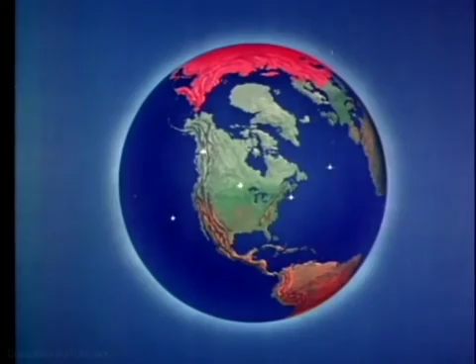Sprawled across North America, from the polar ice cap to the Mexican border, is a giant with 1,000 eyes. Day and night, fair weather or foul, he guards his homeland. This giant is the air defense system of North America, a vast and intricate maze of radar networks. Through the electronic eyes of this giant, we are able to see the enemy before the enemy sees us.

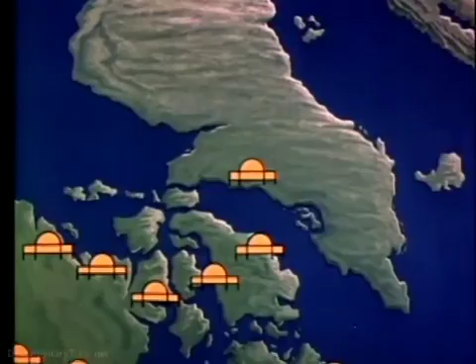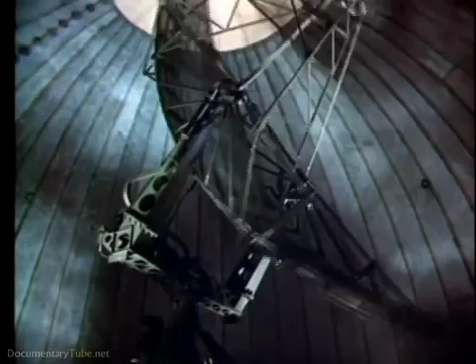These radars never sleep. Round the clock, they stand ready to do their part in minimizing the penetration of enemy bombers. And round the clock, their quietly pulsing hearts, the magnetrons and the klystrons, help generate the power for peace that keeps America strong.

These microwave power tubes, the magnetron to generate the radar signal, the klystron amplifier for radio communication, and radar are the subject of our story. It is a story about these vital tubes, but even more about you, the men who work with them. When you have a well-trained maintenance man with a well-adjusted radar at a well-chosen site, then you've really got a winning team.

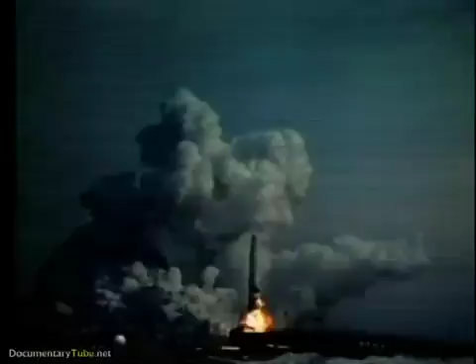They keep the airborne radars operating and ready for crucial missions. In missiles that depend upon radar for guidance. In bombers that depend upon radar for bombing and navigation. In interceptors that depend upon radar for fire control. And in reconnaissance and search aircraft that depend upon radar to extend their vision.

Years of scientific research and millions of dollars worth of equipment have gone into this aircraft. But only if the maintenance men keep the radar functioning can it complete its mission. When something goes wrong, they've got to make a quick decision, whether to attempt repairs in flight or abort the mission.

There's trouble here, that's for sure. But what kind of trouble? First, they check the radar scope presentation. Sometimes this gives a clue. But the most reliable analysis comes from the test equipment on the monitor panel. The spectrum analyzer shows them the conditions in the circuit.

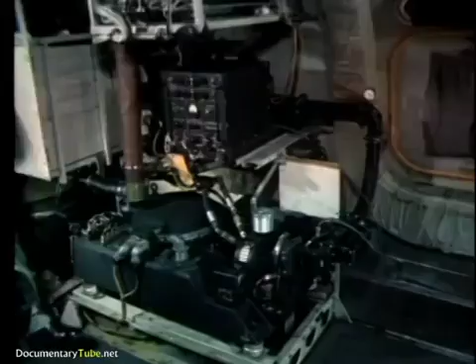The cause might be moisture in the waveguide, corrosion, dents, or scratches. Another trouble spot could be the pressurized antenna system. Loss of waveguide pressure will also cause arcing. Yes, the pressure's low. This is a danger signal. If this arcing continues, the magnetron output window may be damaged, the tube's vacuum lost, and the magnetron destroyed.

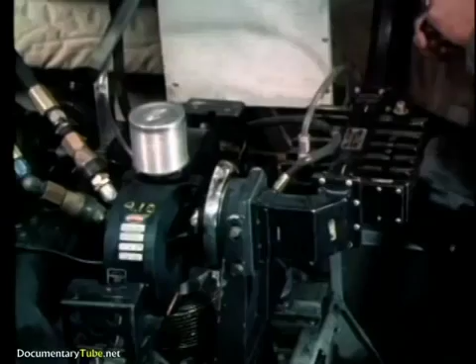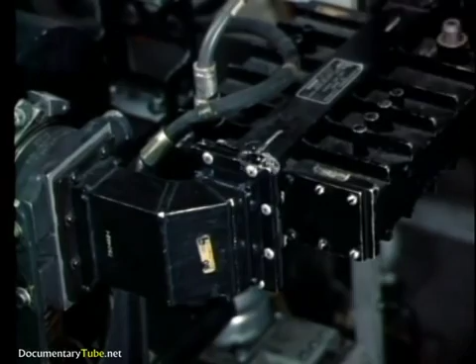Waveguide joints should be tested to make sure they're airtight. This man is making a liquid soap test. See where the bubbles are forming? He's found the trouble. But how serious is it?

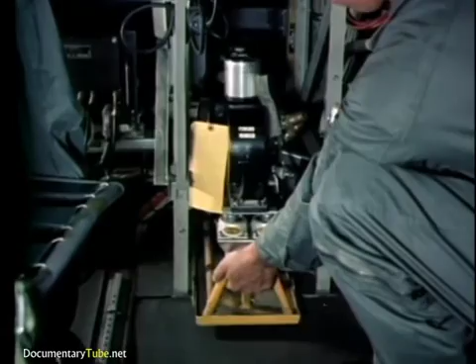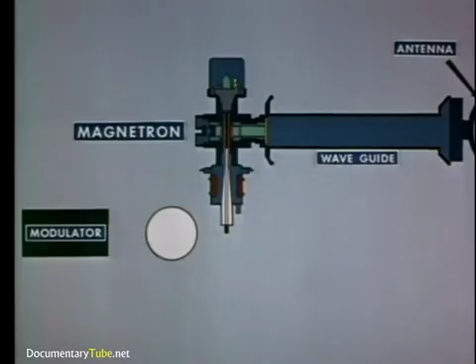While they're working, let's take a look inside the magnetron. Animation shows what caused the malfunction. We'll turn time back a few hours and show the Maggie functioning normally. As the pulse from the modulator is applied, the Maggie produces radio frequency oscillations to form the radar pulse.

This energy is then coupled into the waveguide and directed to the antenna for transmission. Energy is reflected back along the waveguide toward the magnetron. Normally, when the antenna system is in good shape, the reflected wave won't be strong enough to cause arcing at critical points.

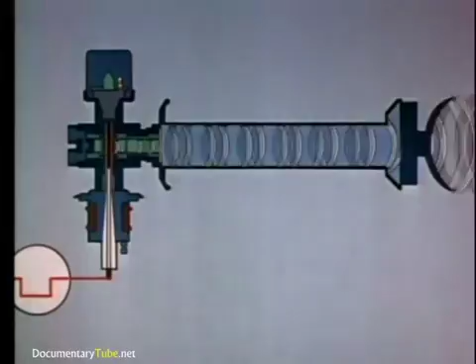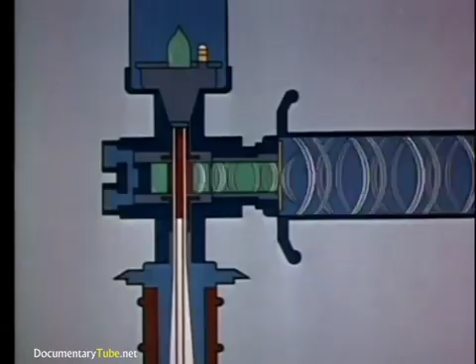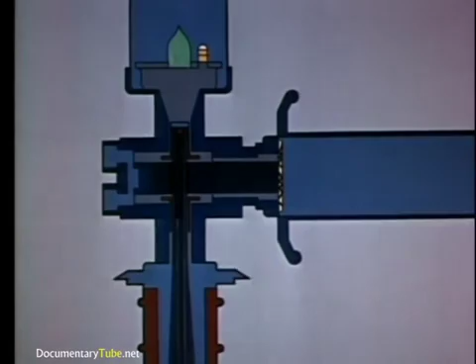But as conditions such as loss of waveguide pressure develop, the antenna characteristics change and the reflected wave becomes greater. Then arcing may take place at the point where the radar wave leaves the magnetron, causing the magnetron output window to crack or puncture. As the vacuum is lost, the heater oxidizes and burns out. The cathode cools. Air seeps into the interaction space, and arcing occurs with each pulse.

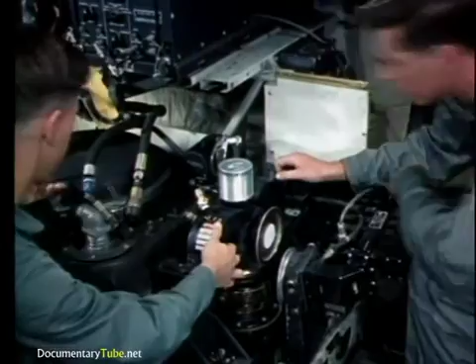After the magnetron has been unbolted, the filament and cathode connections are uncoupled. A large magnetron like this one requires 2 men to handle it safely.

Before a Maggie is replaced, all connections, mating flanges, and sealing surfaces should be inspected. Insulating oil should be examined for foreign matter. Damaged or worn gaskets should be replaced.

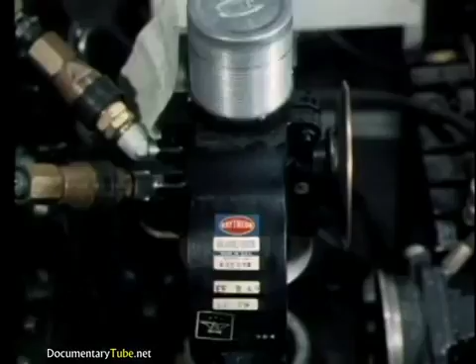Heater's supply voltage should be established at the value marked on the tube. Later, when the plane returns to base, the heater voltage should be double-checked with an accurate instrument. Now that the spare magnetron has been installed, further tests are necessary. The technician must make sure he has the required pressure and that there are no air leaks.

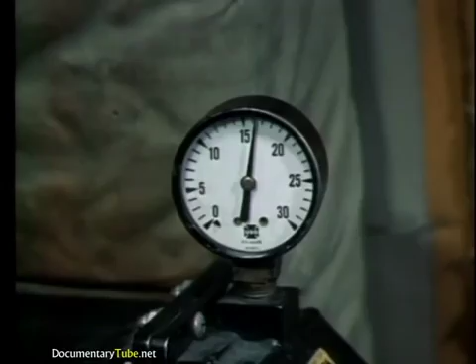Instructions concerning the care of pressurized antenna systems will be found in the appropriate tech order handbook. The liquid soap method is a simple way to check for pressure leaks and may be used where more accurate means of testing are not available.

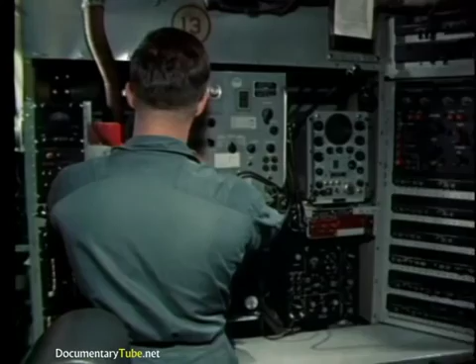Test equipment is used to analyze the performance of a newly installed tube. The output pulse is checked on the spectrum analyzer. See how the large hump or main lobe is symmetrical and sharply defined. The side lobes are relatively small. A presentation like this means that the Maggie is firing properly.

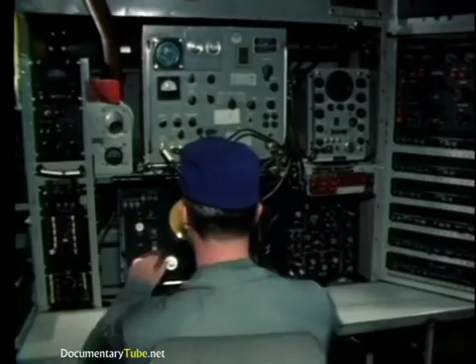Not only that, it means that these technicians know their jobs. They were able to analyze the trouble correctly and replace the magnetron in flight. Because they knew what to do, this aircraft was able to complete its mission.

Let's take a closer look at these microwave power tubes. Magnetrons costing from $100 to $10,000.

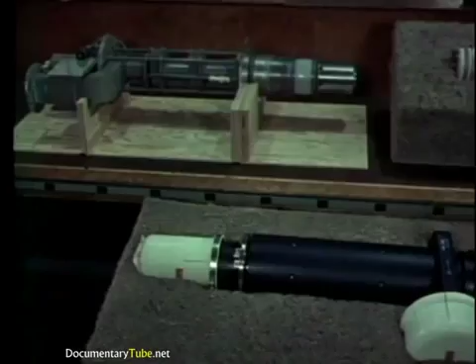Klystrons costing from $1,500 to $25,000 - why so expensive? Let's see what's inside them.

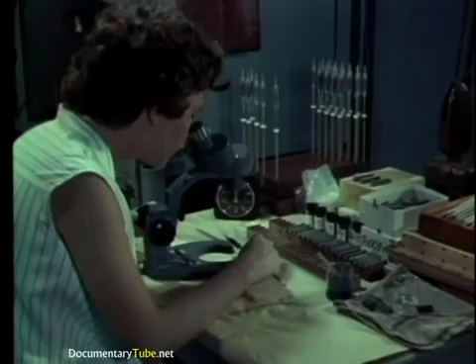Look at this. Parts so critical, they must be inspected through a microscope, with tolerances accurate to 4/1000ths of an inch.

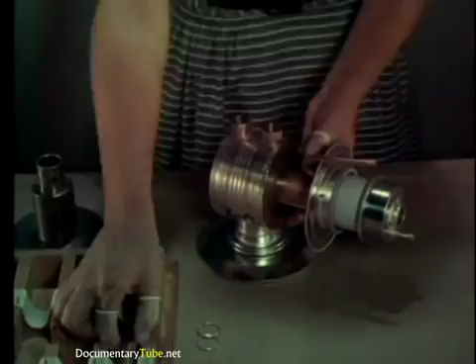To build them to such close tolerances requires involved manufacturing processes. Specialized parts must be carefully assembled.

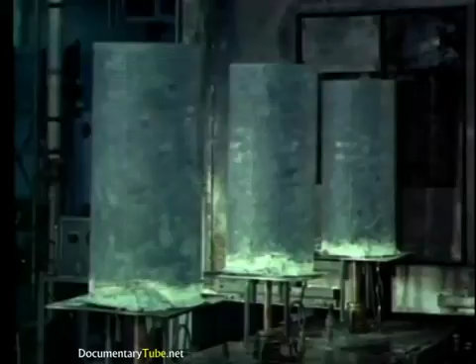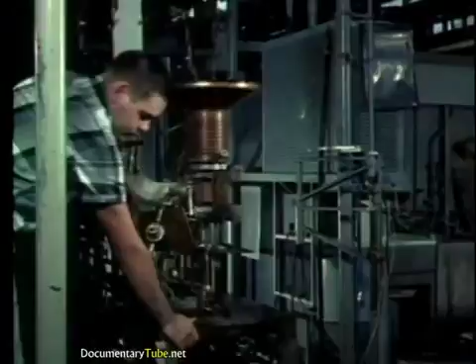The completed assembly is heat treated to bake out gas molecules, so that they may be removed by an evacuation machine.

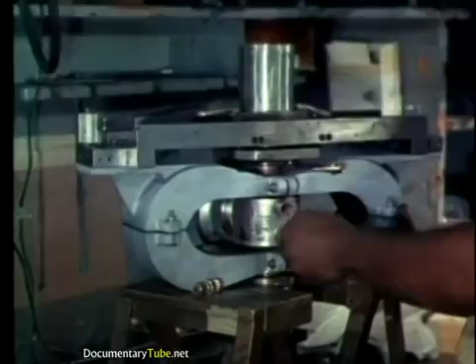External mechanical parts, such as couplings and magnets, are installed. The final step is rigid testing of electrical performance to make sure it meets the high standards required.

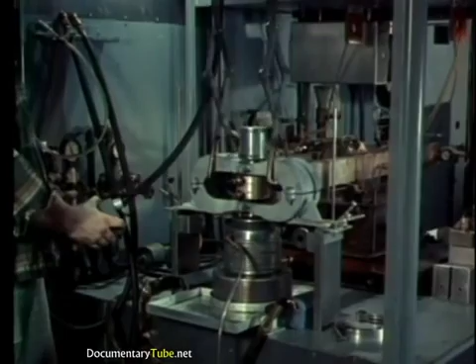Pressure tests ensure leak-proof connections throughout. Now the tubes can be put into storage. Even here, should tiny defects develop while on the shelf, continuous sample testing will reveal them.

Before shipment, the delicate tubes are carefully packaged. The quality designed in during research, built in during manufacture, maintained by rigid testing and careful storage, will reach the user intact.

Here are a few basic rules on proper handling. Always use two men to lift a heavy tube. A portion of a carton makes a good tube stand, protecting delicate parts from damage.

But a wooden rack is better and lasts longer. Save all the cartons and packaging materials. Use them to return defective tubes to the factory.

Magnetrons should be separated at least 12 inches, so their magnetic fields won't interlock. Don't store them on steel shelves or they may be degaussed.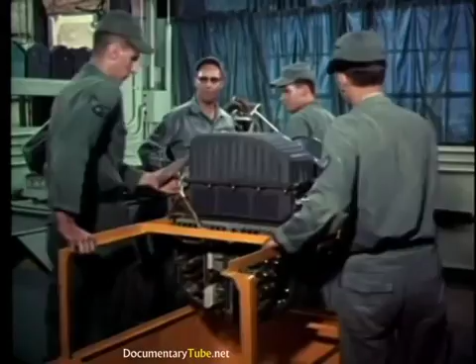The maintenance supervisor is in charge of this work. Before teardown of a defective black box is started, the operational defect should be identified or at least isolated to a particular subchassis.

The pilot's report on the radar failure may give a clue. Comparing the report of malfunction with equipment handbooks may also help to isolate the defect.

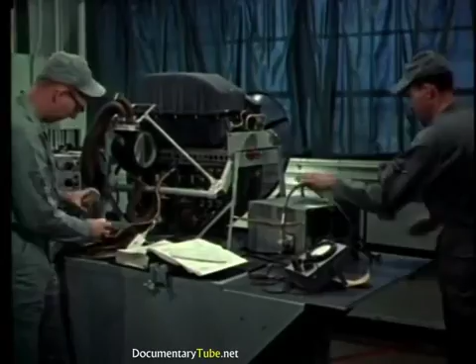But the best aids to repair are the analytical approach of the technician and the special test equipment he uses. An important point to remember is that the transmitter malfunction may be caused by parts other than the magnetron.

Wherever possible, other circuit components should be checked before power is applied. A simple resistance check will often reveal a short circuit.

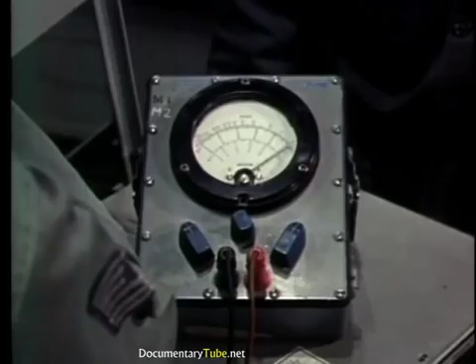That's what the trouble is here. The airman will carry on from here and trace the short circuit.

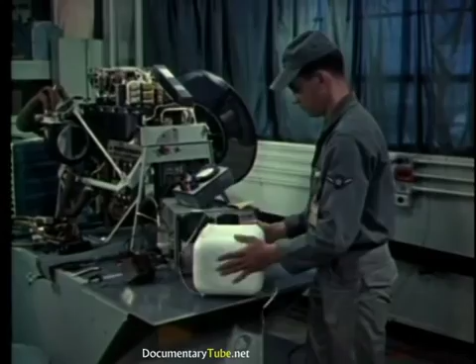So far, so good. He's found a shorted filament transformer and replaced it with a new one. But what's this? He's decided to change the magnetron, too.

The supervisor disagrees. Tube swapping is not a good idea. The old magnetron should be thoroughly tested before any decision is made.

Testing showed that the old magnetron should be replaced. This has been done. Now let's see how the new 'Maggie' behaves.

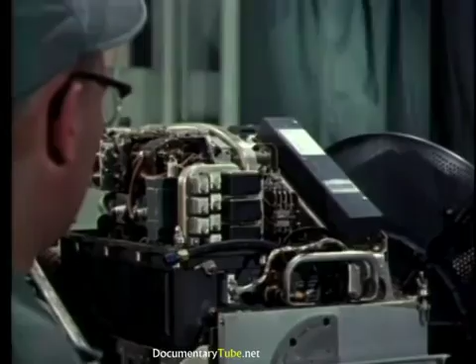This is confusing. The spectrum analyzer shows arcing. Let's look inside the tube and see what's causing it.

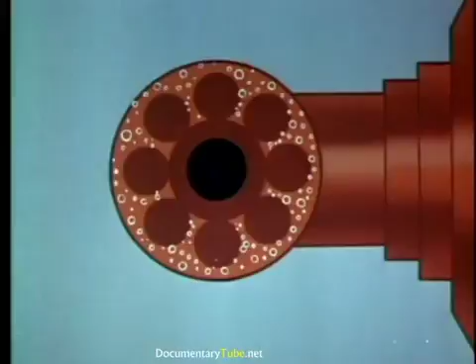Magnetrons are made of porous metals, which usually trap a small amount of residual gas. During storage, gas molecules migrate into the interaction space surrounding the cathode.

When the tube is installed and power applied, it will operate normally if the gas content is low. But if gas content is high, arcing will occur with each modulator pulse.

This arcing might be mild or severe. Frequently, tubes with residual gas can be restored to normal operation by a suitable break-in or seasoning period.

During break-in, the gas molecules are driven back into the walls of the tube, and normal operation resumes. If the equipment is operated frequently, normal operation should continue throughout the life of the tube.

Occasional individual arcs may also be noted in a normal tube which does not contain gas, but this behavior is due to transient conditions and should be considered as normal.

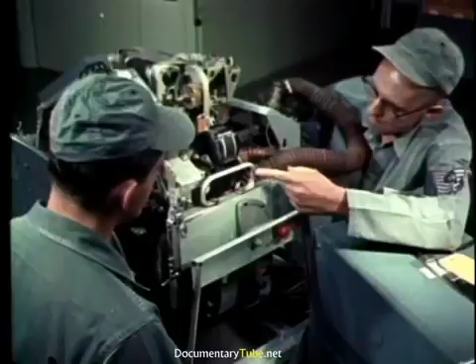All new tubes which display arcing when they are first installed should be thoroughly tested and analyzed before being discarded. This will save the government both time and money.

The repairs are finished. Now comes the break-in procedure. Proper break-in can clear up various degrees of internal arcing.

But watch the spectrum analyzer carefully. If frequent arcs occur, switch to standby immediately.

Small magnetrons may be damaged if severe arcing is allowed to continue more than 2 seconds. Now the range selector switch must be changed to short pulse before the magnetron is operated. If only sporadic arcing occurs, operation may be continued. But a series of arcs may cause the overload to pop. In this case, reset the switch and continue the break-in.

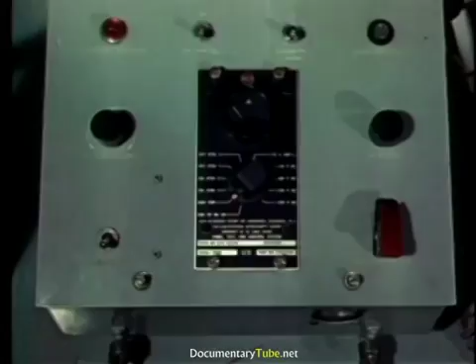To avoid possible damage during the break-in, the technician should keep a close watch on modulator tubes and other components of the RT unit. The time required for break-in will vary with the tube, conditions, and methods used, but normally break-in can be accomplished in 20 to 60 minutes. When break-in is complete, and only infrequent arcs or misfirings occur, operation may be regarded as normal, and the equipment made ready for service.

In addition to the airborne radars, there are a great many ground radar sites scattered about the continental United States and Canada. They are found in almost every type of American scene: in the dusty expanse of the plains, in the northwoods, the heat and humidity of the deep south, in the rolling farmlands of the Midwest, and the salt water scenes of our coastal areas.

Each of these has its own problems of maintaining and efficiently operating its microwave power tubes on a round-the-clock basis. Some of this equipment is completely automatic, but experienced technicians are always nearby, just in case. At the many radar sites where there is no standby equipment, the maintenance man is an even more vital unit in the organization.

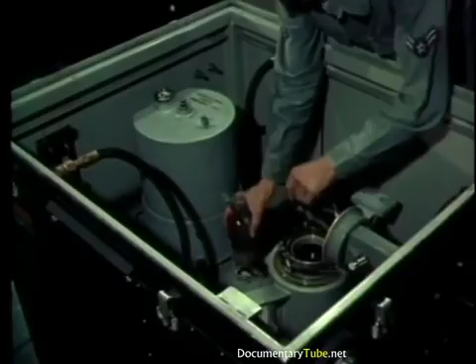Here's the answer. Contaminated oil. The oil failed to insulate. Oil can break down after long exposure to heat and high voltage. Oil may also be contaminated by dust, moisture, metal particles, or air bubbles.

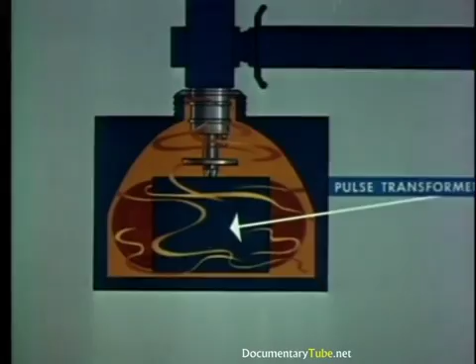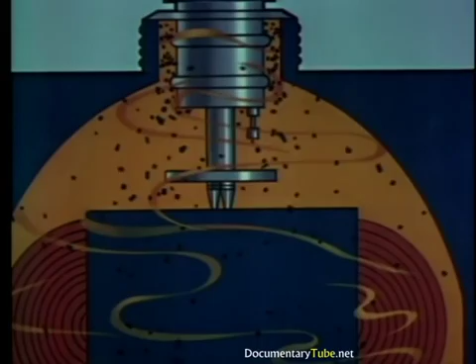Here is how contamination breaks down oil. As contamination accumulates in the oil, current paths are created between high voltage terminals and ground. As the condition becomes worse due to increase of contamination and change in oil structure, a definite high voltage path for corona discharge is created in the oil. The corona discharge begins to erode the surfaces of the insulator. As the insulators are penetrated, the vacuum in the tube is destroyed, and the tube is damaged beyond recovery.

The maintenance men have completed oil replacement using all precautions to prevent contamination. They have checked the grade of oil against tech orders and factory instructions.

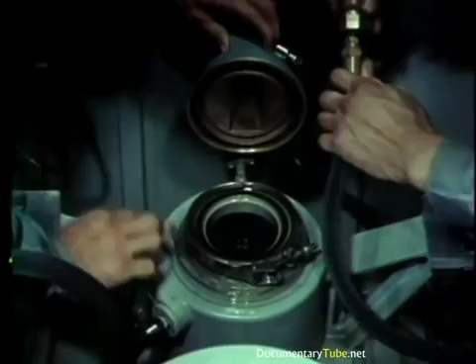Before installing the new Maggie, all mating surfaces and flanges must be inspected and cleaned or replaced as required. It is also necessary to check waveguide parts, replace gaskets, coolant hoses, oil fittings, and so forth. Be sure all electrical connections are secure.

Careful, watch out that terminal doesn't hit the cabinet. That could ruin the tube.

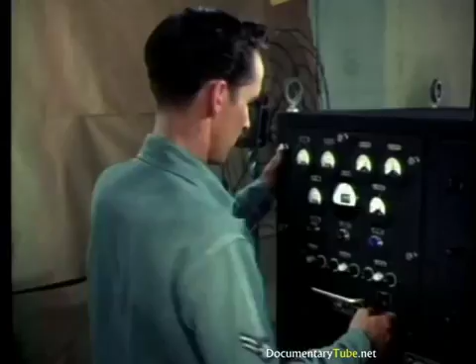Make certain that all clamps, bolts, coolant hoses, and so forth are secure before operating the tube. All set? Okay, hit the power button. Uh-oh, that one didn't last long.

There are many reasons why new tubes may fail to function properly. One of the primary causes of tube failure is damage sustained during transportation and handling. This damage may occur during shipping or in the depot, or during Air Force distribution to the base.

Here is what actually happened to that new tube which failed to operate. Nobody saw it happen. Nobody's going to tell. And nobody's going to get the slightest use out of that magnetron.

But these men don't know this Maggie fell off a truck. They just know it won't work. Could it be something wrong with the rest of the equipment? A short circuit? A bad connection? Or should they pull out this Maggie and install another?

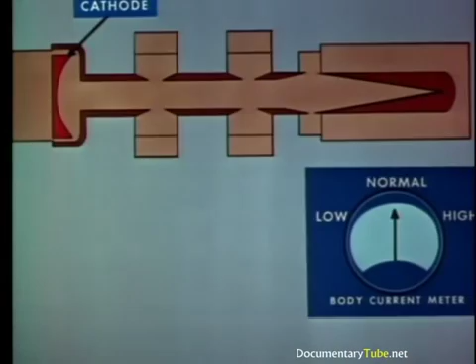Let's look inside a typical two-cavity power klystron and see how it operates. The beam current is emitted by a heated cathode and passes through the drift tube sections.

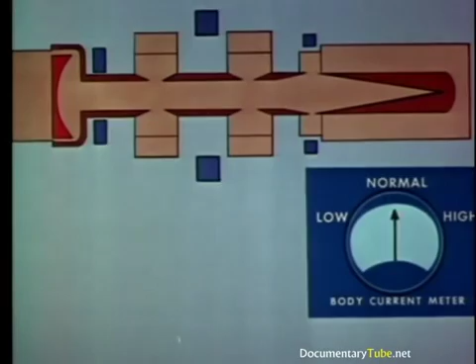Since electrons in the beam have like charges, they repel each other and tend to diverge, to be absorbed by the walls of the drift tube sections. But electromagnetic coils placed along the tube align them into straight paths. However, misalignment of the focus coils can seriously damage the drift tube tips. Therefore, it is most important to adjust the magnetic coil currents properly during installation of the tube.

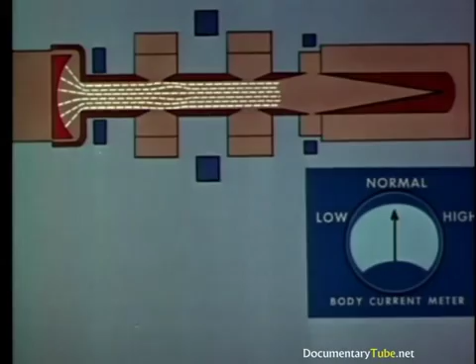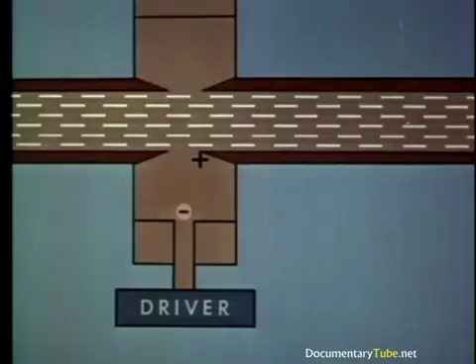When a steady, direct current is flowing through the tube, an RF signal from the RF driver stage is introduced into the first cavity resonator. As the cavity is tuned to resonance, a strong RF field appears between the drift tube tips, which form a gap in the resonator.

The electrical charges on these tips alternate at the driver frequency rate on opposite sides of the gap. At the same time, individual electrons in the beam are being accelerated or decelerated at the RF frequency rate. This produces bunching of the electrons as they approach the gap in the second resonator. There they are decelerated and release energy. The resonator converts this energy to RF energy and amplifies it.

Additional resonators are sometimes provided for greater amplification. From the last resonator, the amplified RF signal is coupled into the waveguide and transmitted to the antenna.

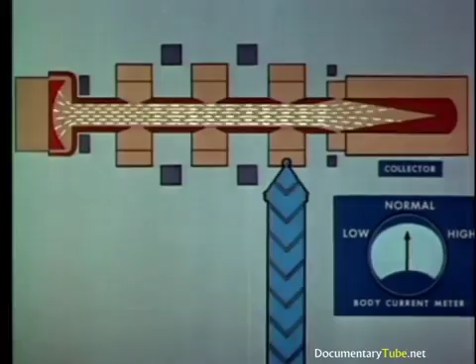Various kinds of klystrons are being phased into new Air Force applications, such as these tropospheric scatter communications transmitters. In this way, intelligence may be relayed from remote early warning sites to control centers many hundreds of miles away.

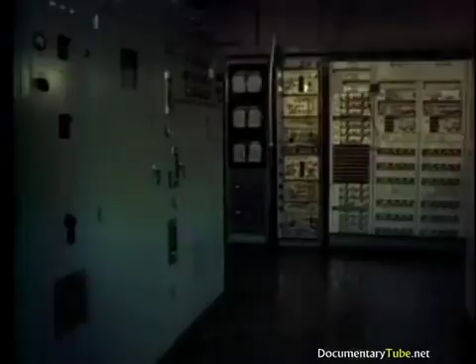This transmitter has dual equipment. One transmitter operates while the other is on standby in case of emergency. The equipment is automatic. Meters and instruments keep a constant check on its operation, and a warning light flashes in case of trouble.

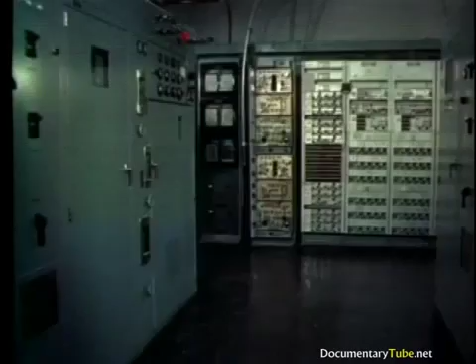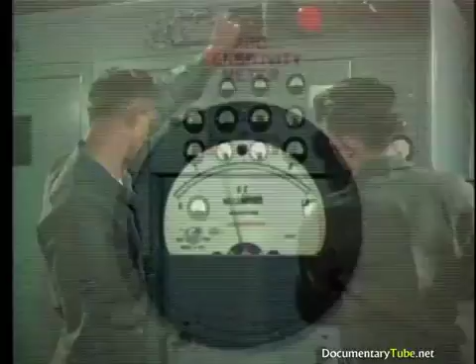Readjustment of the output cavity and coupler may correct the trouble, but the arcing continues. Since adjustment won't correct the trouble, all they can do is shut down the transmitter for repair and switch over to standby.

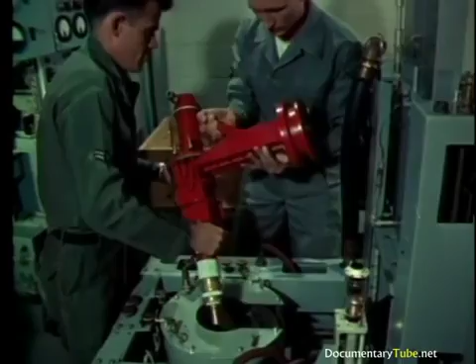The klystron has been removed for inspection. It may have been damaged by the arcing. Yes, the output ceramic is badly damaged.

An important consideration in maintaining the klystron is the proper adjustment of the impedance matching unit. In this case, improper adjustment of this unit during installation ultimately caused the arcing in the output section, which in turn destroyed the tube.

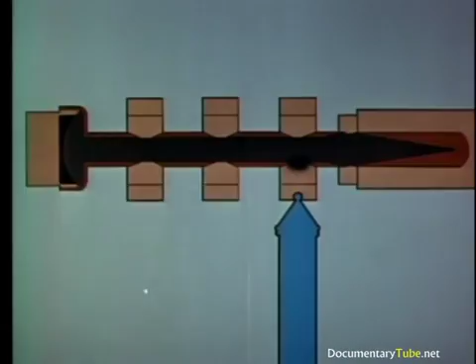There are two types of meters which help maintain proper coupling: the power output meter and the VSWR, or voltage standing wave ratio meter. These measuring devices should periodically be checked for accuracy.

But in general, the best way to avoid damaging or destroying the klystron is to study and thoroughly understand the various installation and operating instructions furnished by the equipment and tube manufacturers. Only by doing this can the Air Force technicians and maintenance men hope to get the full operating life from their klystrons.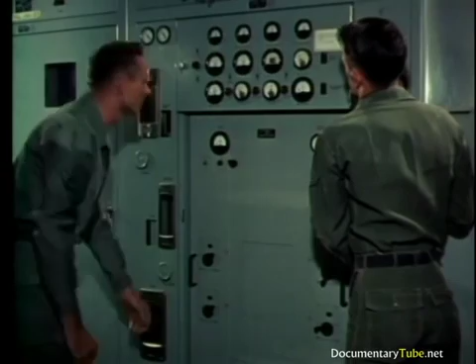At the Tropo Shack, the maintenance men have installed the new klystron. But before operating at full power, they are careful to recheck all circuit meter readings and coolant flow gauges. These meters are important because a minor error in one of the adjustments might shorten the life of the tube.

The power klystron is really a very dependable piece of equipment if properly treated. Once it has been correctly installed and aligned, it requires very little maintenance during its long service life. A good rule to follow is: install it carefully, align it properly, then leave it alone.

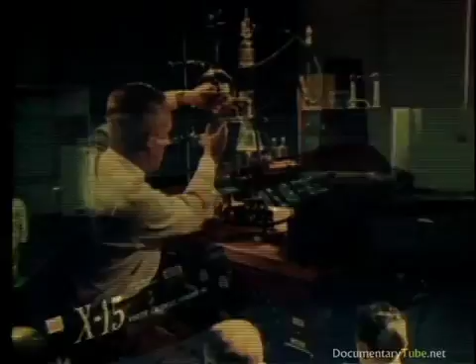As the progress of aircraft and air defense continues, other and more varied uses will undoubtedly be found for microwave power tubes. With these new applications will come new problems to be solved by maintenance men of the future. Those men will tread the paths charted by technicians of today who found that this type of maintenance can be simplified by careful attention to four basic factors: careful handling,

proper break-in, avoidance of tube swapping and trial and error maintenance, and the timely use of maintenance aids such as test equipment, tech order handbooks, and manufacturer's information pamphlets. There is no substitute for know-how, initiative, and ingenuity.

Yet no one man or group of men can do this job alone. Maintenance is a team effort. Only by the cooperation of procurement, supply, transportation, and every department concerned can the Air Force continue to operate the reliable radar equipment which is such a vital part of national defense.

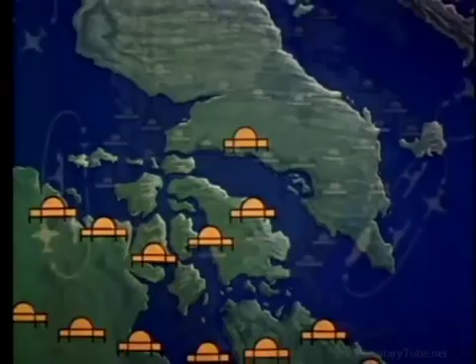Only by continued teamwork and devotion to duty can the radar eyes of America guide us to that peaceful tomorrow, which is the reward of nations who stay alert today and every day.